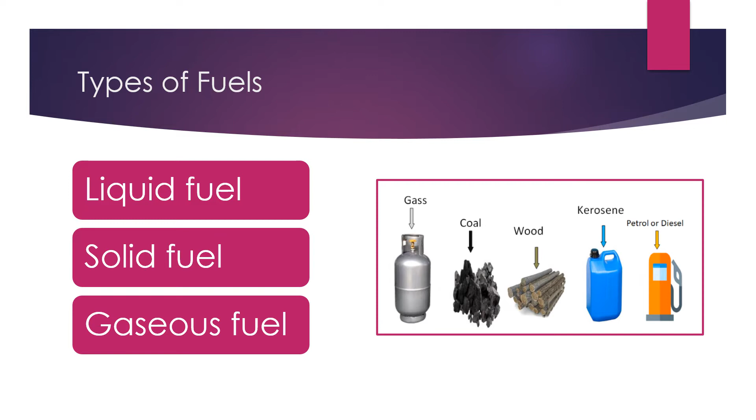Now coming to some of the advantages. Number one advantage is calorific value of liquid and gaseous fuels is higher than the solid fuels. Number two advantage is liquid and gaseous fuels have higher ignition temperature than the solid fuels. Number three advantage is liquid and gaseous fuels are easier to store since solid fuels occupy lot of space.

In this video, we will discuss about liquid fuels only. Some of the examples of liquid fuels are furnace oil, LSHS, LDO, gasoline, kerosene, LPG, etc. A liquid fuel used in homes is liquefied petroleum gas or LPG. Furnace oil, LSHS, and LDO are used in industries. Cooking, lighting, and heating are the main household services provided by kerosene. Gasoline is the most common automobile fuel and is used all over the world to power cars, motorcycles, scooters, boats, and other machineries.

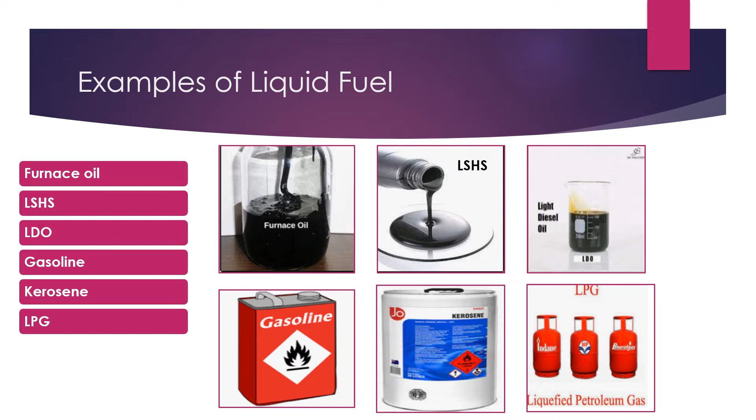Now, let us discuss about the properties of a liquid fuel. These properties are density, specific gravity, viscosity, flash point, pour point, specific heat, calorific value, sulfur, ash content, carbon residue, and water content.

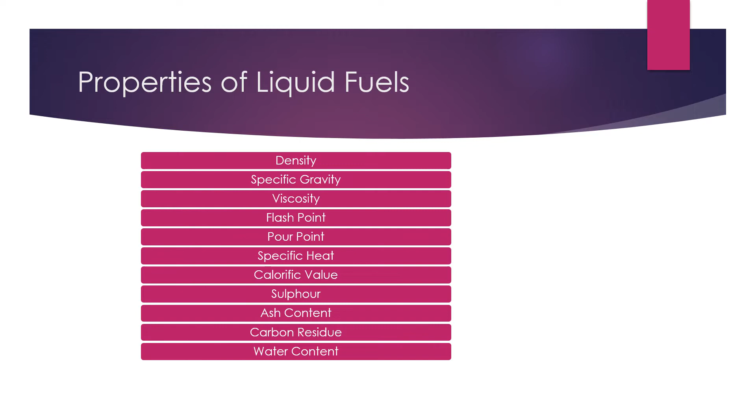Density is one of the important properties of fuel. Density is the ratio of mass of fuel to the volume of fuel at 15 degrees centigrade. Density is measured by an instrument called hydrometer. Density is required for calculating the quantity of fuel to be used. Higher density indicates more weight of the fuel for the same volume. So less fuel will be required for higher density fuel.

Density is also required to evaluate the ignition quality. It will be difficult to atomize a denser fuel. So ignition of a denser fuel will be difficult in comparison to a less denser fuel. The unit of measurement of density is kg per meter cube or gram per centimeter cube or gram per cc.

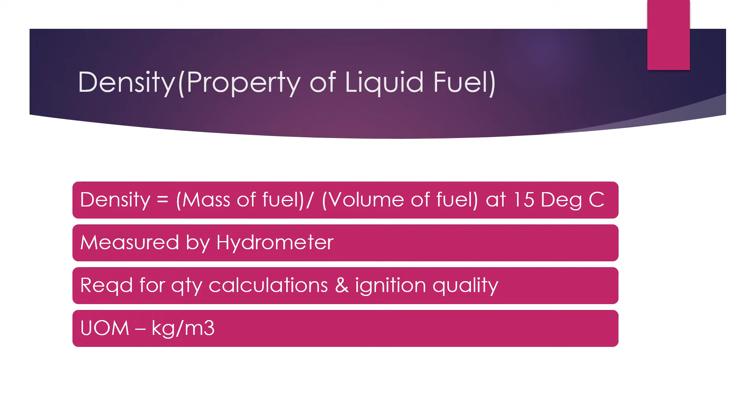Now let us discuss about specific gravity of liquid fuel. Specific gravity is the ratio of weight of given volume of fuel to the weight of same volume of fuel at given temperature. Specific gravity is nothing but the density of fuel with respect to water. If it is less than 1, then it means the liquid is lighter than water, and if specific gravity is more than 1, then the liquid is denser than water. In case of water, the specific gravity is 1. Since specific gravity is the ratio of two densities, it has no unit.

Specific gravity is measured with hydrometer. Specific gravity of some of the liquid fuels have been shown in the table. The specific gravity of LDO varies from 0.85 to 0.87. The specific gravity of furnace oil varies from 0.89 to 0.95, and the specific gravity of LSHS varies from 0.88 to 0.98.

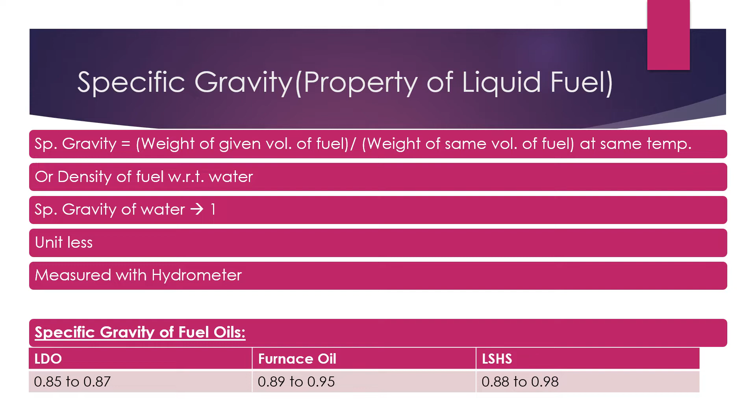Let us discuss about another property of liquid fuel, that is viscosity. Viscosity is the internal resistance to flow. That means a liquid having higher viscosity offers higher resistance to flow. So a higher viscous liquid will not flow easily compared to a liquid having lower viscosity. Viscosity also depends on temperature of the liquid. When temperature increases, viscosity of a liquid decreases and it flows easily. Viscosity of a liquid has to be specified at a given temperature.

Viscosity is measured in Stokes or centistokes, Engler, Saybolt, Redwood, etc. Viscosity is measured in a viscometer. Viscosity is important from the point of view of storage and use of fuel. That means for storing a higher viscous liquid fuel like heavy furnace oil, heating arrangement has to be done in the storage tank to facilitate its flowability. Similarly, for a lower viscous fluid fuel like LDO, heating arrangement is not required at the storage tank.

For handling, storage and satisfactory atomization, degree of preheat depends on viscosity. If a viscous liquid is not atomized properly, then there will be carbon deposits on burner tips or on the water walls of the boiler. So preheating of viscous liquid is required for proper atomization.

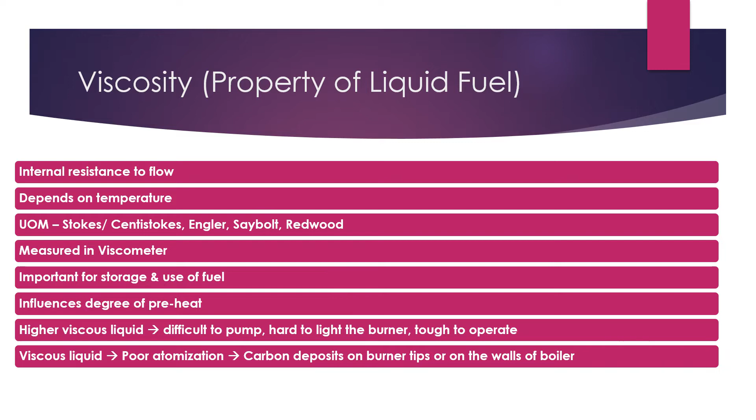Let us discuss about another property of liquid fuel, that is flash point. Flash point is the lowest temperature at which a liquid gives off momentary flashes when exposed to open flame. In other words, the flash point of a liquid fuel is the temperature to which it must be heated to emit sufficient flammable vapor to flash when brought into contact with a flame.

As shown in the picture, the flash point of gasoline is minus 23 degrees centigrade. When gasoline is exposed to fire from a matchstick, it catches fire at room temperature. At the same time, diesel, whose flash point varies from 55 to 66 degrees centigrade, does not catch fire at

room temperature when exposed to an open flame from a matchstick. The flash point is an important concept in fire investigation and fire protection because it is the lowest temperature at which a risk of fire exists with a given liquid. It is crucial in many circumstances to establish the presence of some liquids and to know their flash point during the investigation process.

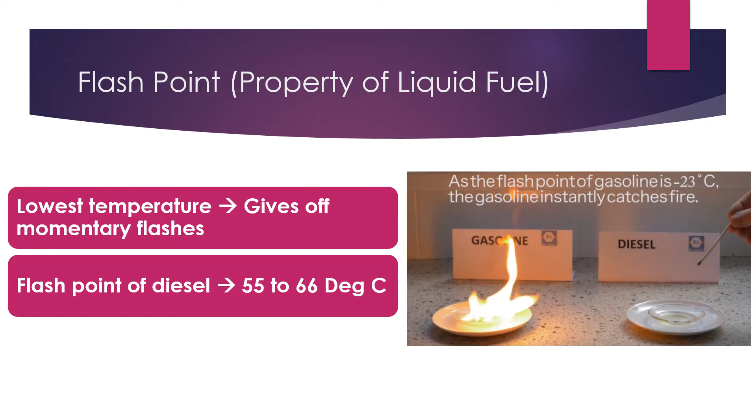Let us discuss about another property of liquid fuel, that is pour point. It is the lowest temperature at which oil flows in a specified lab test. Specifically, the pour point is 3 degrees centigrade above the temperature at which oil shows no movement when a lab sample container is held horizontally for 5 seconds.

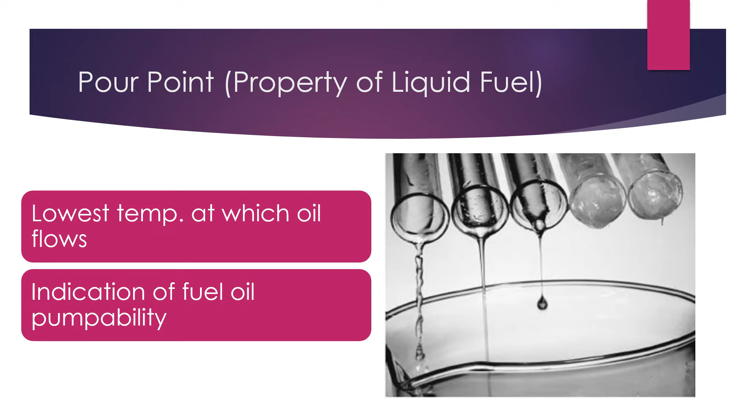If the surrounding temperature is less than the pour point, it cannot be transferred through a pipeline. Pour point is more significant for lubricating oils. Pour points provide the lowest temperature for that fluid at which it can transfer by pouring.

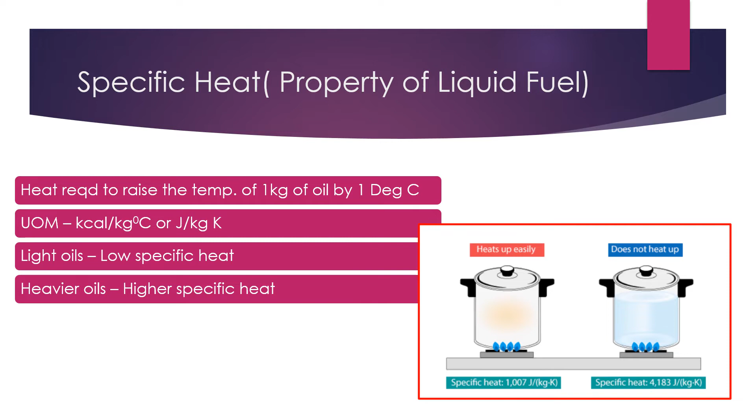kilocalorie per kg degree centigrade or joule per kg Kelvin. Light oils have low specific heat, whereas heavier oils have higher specific heat. For example, LDO has less specific heat compared to heavy furnace oil, so less heat would be required for LDO to reach its ignition temperature in comparison to HFO.

When combustion of fuel takes place, heat is released. During this process, the moisture present in the fuel absorbs some amount of the heat. At the same time, the hydrogen present in the fuel reacts with oxygen and is converted into water. This water also absorbs some amount of heat liberated during combustion of fuel. So net calorific value is calculated by subtracting the heat absorbed by moisture from the heat of combustion.

Gross calorific value is the total amount of heat liberated during combustion process, which does not take into account the heat absorbed by moisture. We can also say that the difference between gross calorific value and net calorific value is the latent heat of condensation of the water vapor.

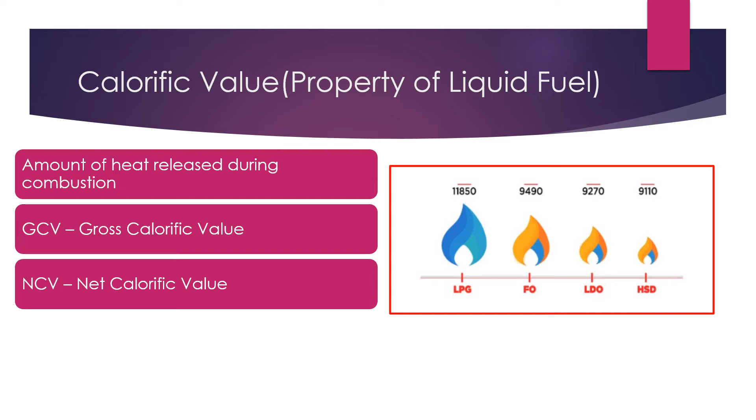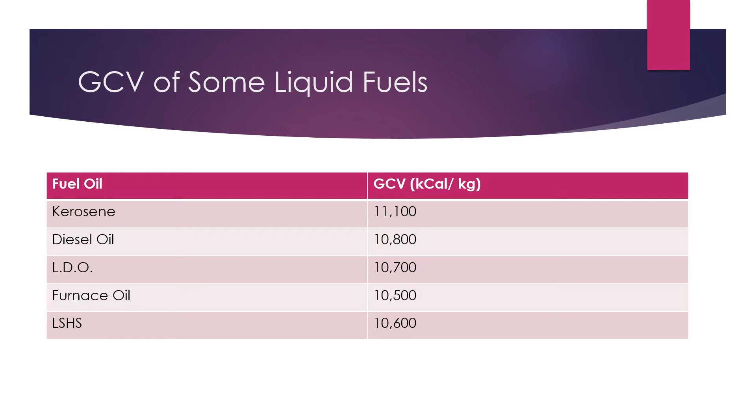Now coming to the relation between gross calorific value and net calorific value. Gross calorific value is equal to net calorific value plus 584 multiplied by 9 times H2 percentage plus M percentage, divided by 100, where H2% is hydrogen percent by weight present in the fuel, M percent is moisture percent by weight present in the fuel, and 584 is latent heat corresponding to partial pressure of water vapor in kilocalorie per kg. This is a very important formula and a few numericals may be expected from this formula.

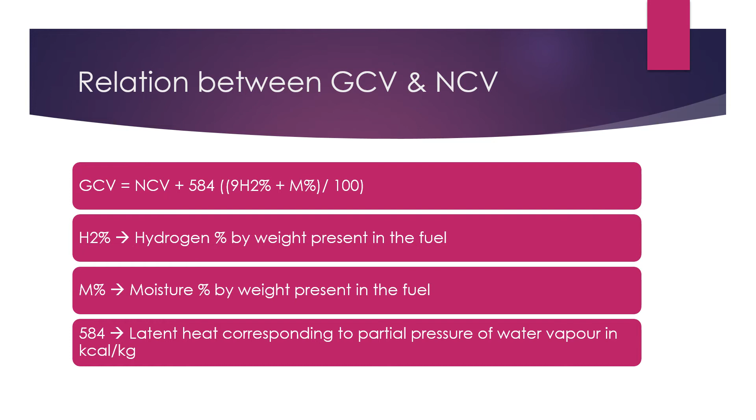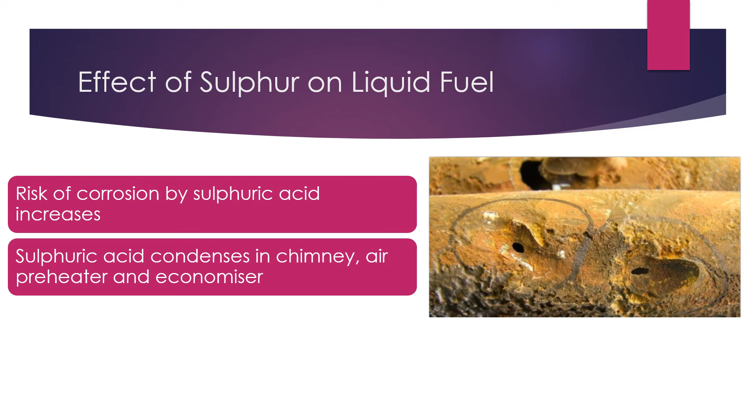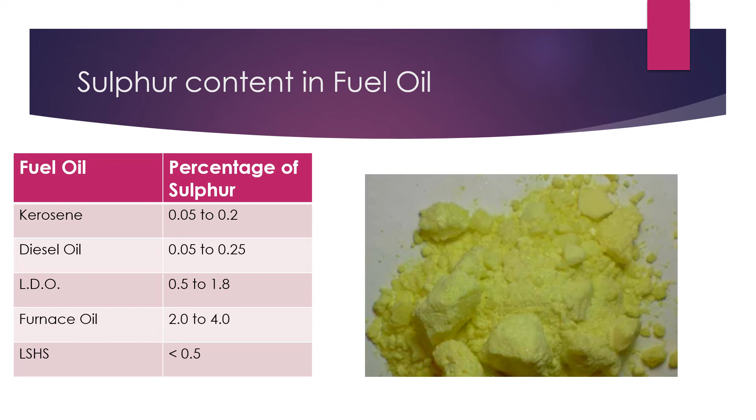Let us discuss about another important constituent of fuel oil, that is ash content. It is an indication of the inorganic material in the fuel oil. Ash content in the fuel oil varies from 0.03 to 0.07%. Excessive ash leads to deposits in combustion chamber. Ash has erosive effect on burner tips. It also gives rise to high temperature corrosion and fouling of equipment.

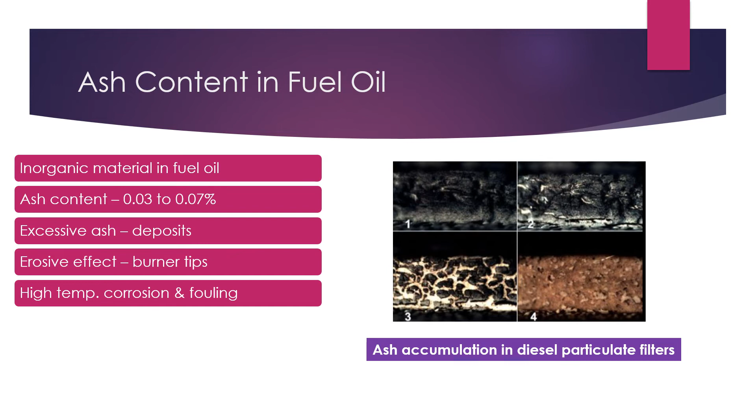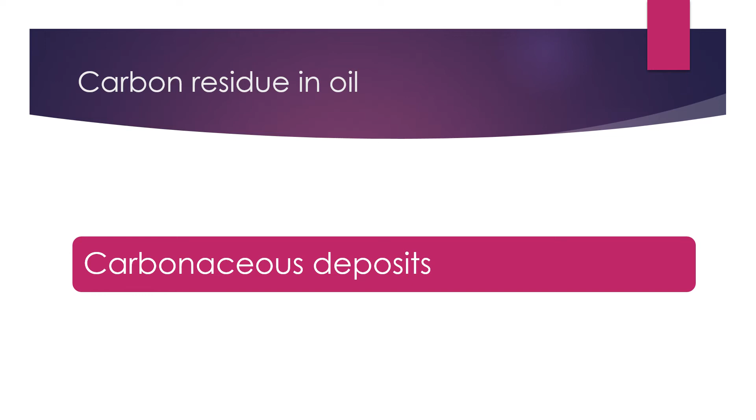Now let us discuss carbon residue in oil. The carbon residue provides information on the carbonaceous deposits which will result from combustion of fuel when the vaporizable constituents of fuel evaporate. For fuels with high carbon content, it is difficult to burn them fully, which results in increased deposits in the combustion chamber. Carbon residue is an indication of the fuel's tendency to decompose and form carbonaceous material that can plug diesel fuel injection nozzles.

Now let us discuss water content in liquid fuels. Water may be present in free or emulsified form in liquid fuel. If water contains dissolved salts, it damages the furnace internals during combustion of liquid fuel. Water also causes spluttering of the flame at the burner tip, that is, it makes a series of short explosive spitting or choking sounds. Spluttering has a tendency to extinguish the flame, to reduce the flame temperature, or to lengthen the flame.

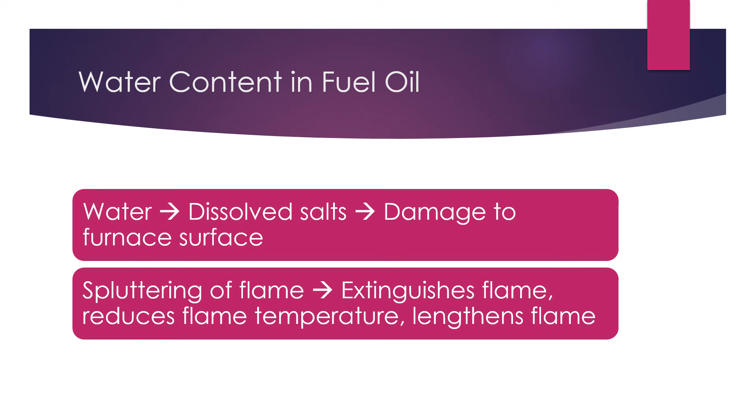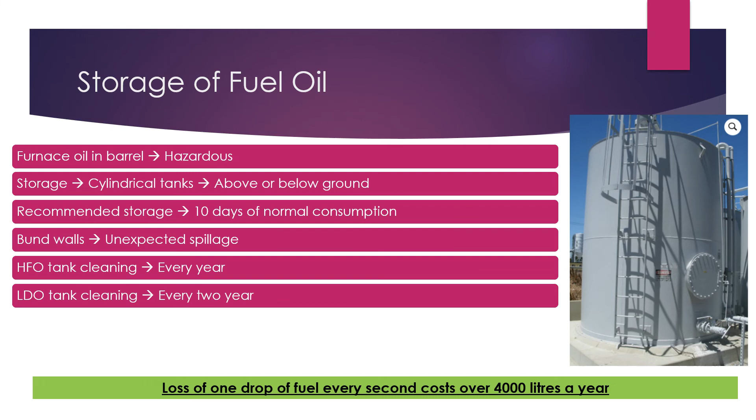The fuel oil which comes to the plant in tankers may contain contaminants which may choke the line or damage the pumps. So to remove the contaminants, strainers are provided at different locations like between the tank decanting point and storage tank, between service tank and preheater, and between preheater and burner.

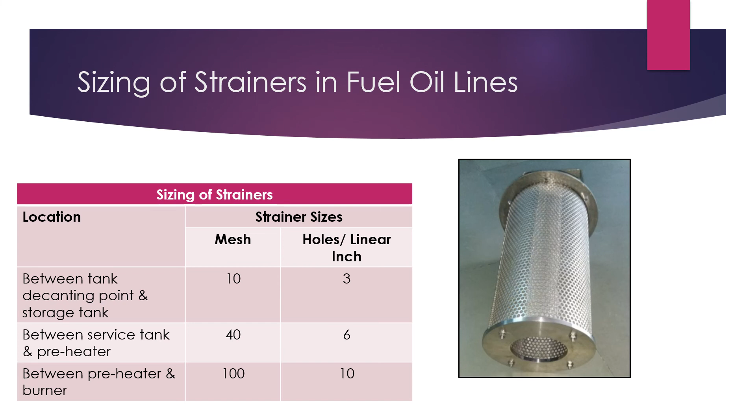The selection of sizes of strainers differs for different locations. A 10 mesh size strainer should be used between tank decanting point and storage tank - this consists of 3 holes per inch. Similarly, a 40 mesh size strainer should be used between service tank and preheater, consisting of 6 holes per inch. A 100 mesh size strainer should be used between preheater and burner, consisting of 10 holes per inch.

Positive displacement pumps are used for pumping heavy fuel oils which have higher viscosity. Gear pumps have a longer life compared to diaphragm pumps, but it is easier and less expensive to repair diaphragm pumps. Centrifugal pumps are not used for viscous liquids - their efficiency decreases sharply as viscosity increases, and power required for pumping also increases with increase in viscosity. Light fuels are best pumped with centrifugal pumps or turbine pumps. For higher pressure applications, piston or diaphragm pumps are used.

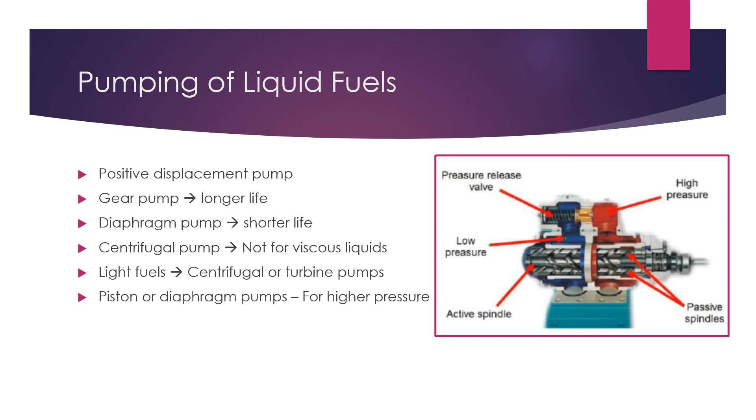Coming to fuel storage and pumping temperature, as temperature decreases, the viscosity of furnace oil and LSHS increases, so the pumpability of these liquid fuels decreases as temperature decreases. Furnace oil is not pumpable at atmospheric temperature, so it is preheated to make it pumpable.

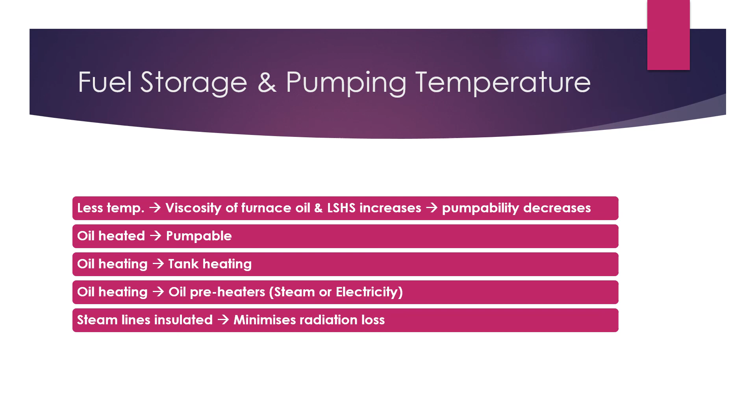The entire oil tank may be preheated using steam coils at the bottom of the tank. The steam pipelines leading to these coils are fully insulated to minimize radiation heat loss. The oil can also be preheated at the outlet of the pump with the help of heaters, with steam used for preheating in this case as well. The entire fuel oil tank and the preheaters are insulated to minimize radiation heat loss. Electricity can also be used as a heating medium for the oil heater.

Let us discuss temperature control of oil. As oil flow is reduced or stopped, the oil will be overheated if steam admission quantity is not decreased or electricity is not controlled. So to ensure this doesn't happen, thermostatic temperature control is used. This is extremely important for electric heaters, as oil may get carbonized when there is no oil flow and the heater is in service. In case of steam preheaters, control valves are provided to control the steam temperature of oil. Thermostats should be provided at a region where oil flows freely into the suction pipe.

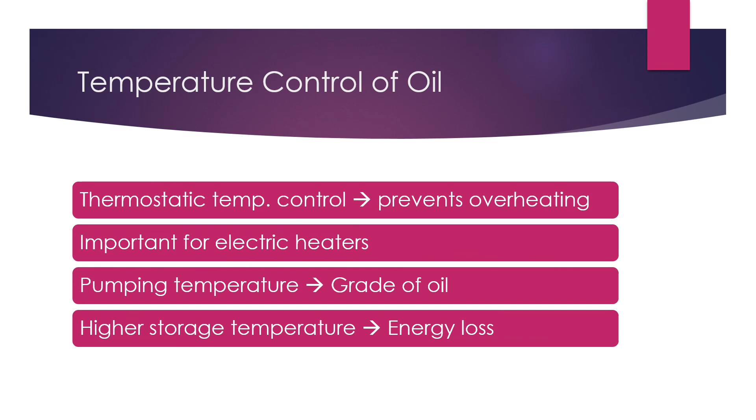The pumping temperature of oil depends on the grade of oil being used. Higher storage temperature of oil than required for pumping leads to energy loss.